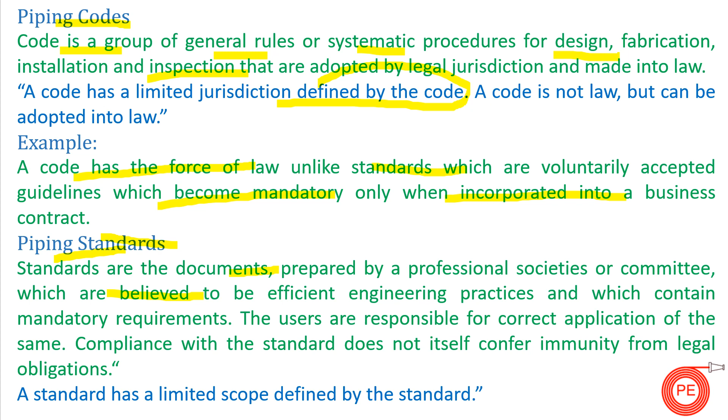So what are piping standards? So guys, standards are the documents that have been prepared by some professional societies or committees which are believed to be efficient engineering practices and which contain mandatory requirements. The users are responsible for correct application of the same. Compliance with a standard does not itself confer immunity from legal obligations.

So guys, piping standards are those documents which tell us about the best engineering practices. These best engineering practices help us fabricate and design things in a better way, and these documents have been prepared by industrial professionals who are efficient in their work and have huge industrial experience. So a standard has a limited scope defined by the standard.

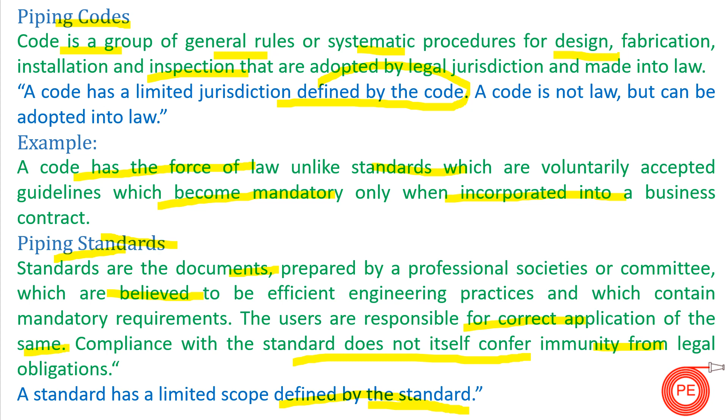So this is the difference between piping codes and standards, and both of them are sometimes confused by people and used interchangeably. So let's see in today's video what are the different societies and organizations followed all over the world which define these piping codes and standards. Every country generally has its own organizations and societies which define these piping codes and standards. For America, as you know, most of the piping codes, standards and design bases that are followed worldwide are American.

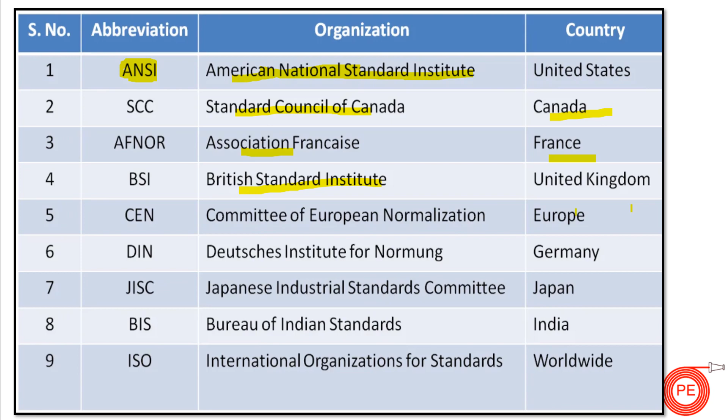So ANSI, that is the American National Standards Institute, defines all these codes. SCC is the Standards Council of Canada, that is Canadian. France has AFNOR, that is Association Française. The United Kingdom has its own British Standards Institution. Europe has the Committee of European Normalization.

Germany has Deutsches Institut für Normung. Japan has Japanese Industrial Standards Committee, that is primarily known as JISC. German standard, you would have heard about your DIN standard, and for British you would have heard about BSI standard. Our Indian standard, that is BIS, Bureau of Indian Standards, and the worldwide standards that are followed are of International Standard Organization, that is ISO standards.

So all these organizations primarily work and define all those standards, and they are more or less equivalent to each other, but country to country they may vary. So all these organizations generally look after these codes and standards which are made and enforced in a proper way throughout the country, so that uniformity is followed all across the country, all across the piping or process plants.

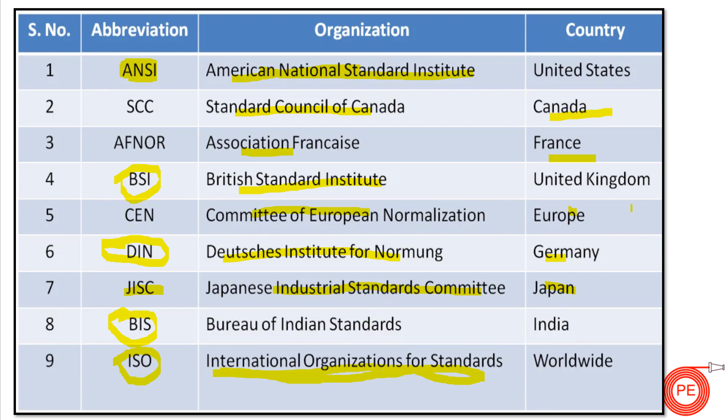So let's see what are the different codes that are followed in the industry. Below mentioned is a list of the codes that are generally used in our process industry. The most important and basic code which you would have heard is your ASME B31.1. ASME B31.1 is your power piping code. All the power piping related definitions, all the power piping related design criteria are mentioned in this power piping code, that is ASME B31.1.

When we talk about process piping code, yet another important piping code is ASME B31.3. All the important design criteria and fabrication related criteria that will be enforced by the law are mentioned in your ASME B31.3. Next is ASME B31.4. This is your pipeline transportation system for liquids and slurries. So basically when we design slurry lines and liquid lines, we have to follow the guidelines mentioned in this ASME B31.4.

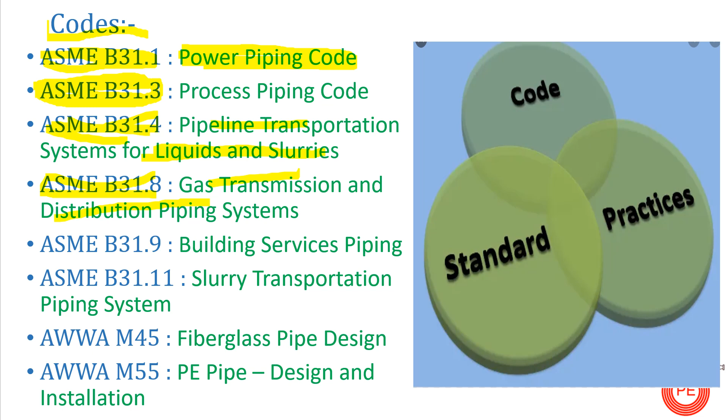ASME B31.8 provides us the information on gas transmission and distribution piping systems. Similarly, ASME B31.9 gives information on building services piping. ASME B31.11 is slurry transportation piping systems. This is also one of the important piping codes that is followed while designing any slurry transportation. AWWA, that is American Water Works Association M45, is for fiberglass pipe design. AWWA M55 is PE design and installation.

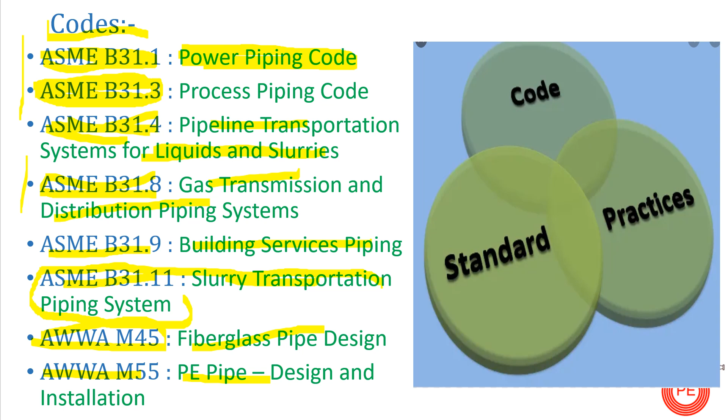So guys, we have a few other piping codes, but I have just taken a glimpse of the important piping codes that are used day in, day out in our piping industry or in our process industry. So let's see about the piping standards that are used. Because this is an Indian video, I have mentioned a few of the Indian standards here. IS 1239 part 1 is one of the important piping codes that is used in your process industry.

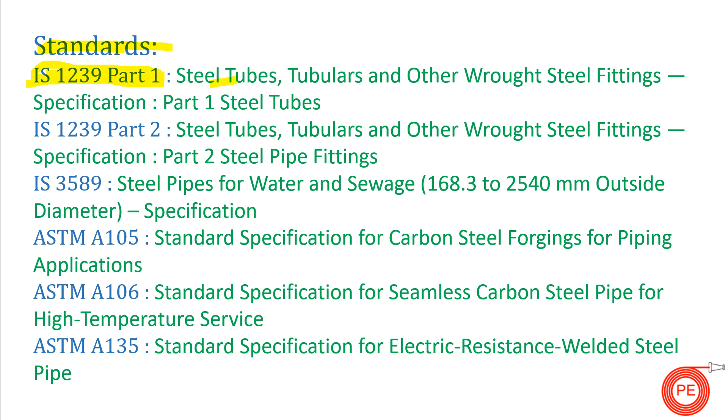This IS 1239 part 1 covers steel tubes, tubulars and other wrought steel fittings. So basically this is a pipe fitting code. IS 1239 part 2 is also a pipe fitting code, but the difference here is diameter. IS 3589 is also a piping code, but diameters greater than 150 up to 2540 are covered under this standard. Next is ASTM A105, that is standard specification for carbon steel forgings for piping applications. So carbon steel forgings are taken from this code.

ASTM A106, that is standard specification for seamless carbon steel pipe. So when we talk about seamless carbon steel pipe, what will be the design criteria and how they have to be taken care of is mentioned in this ASTM A106 standard. ASTM A135, that is standard specification for ERW pipes or electric resistance welded steel pipes. All the things related to electric resistance welded pipe are mentioned in this standard ASTM A135.

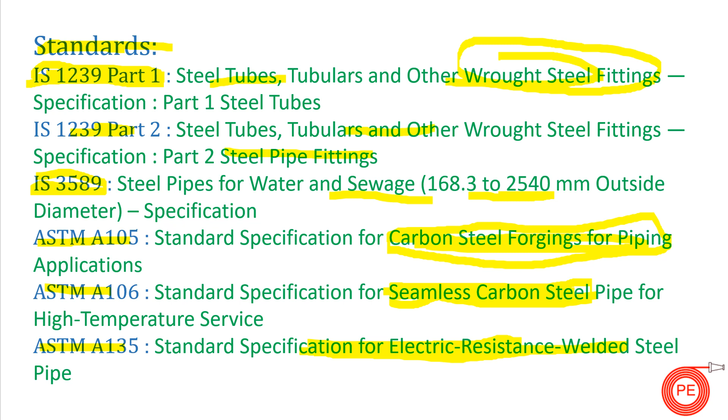Moving on to next. When we talk about schedule numbers, we all are aware of the schedule numbers. The schedule number is actually part of this standard, that is ASME B36.10. That is the standard for welded and seamless wrought steel pipe.

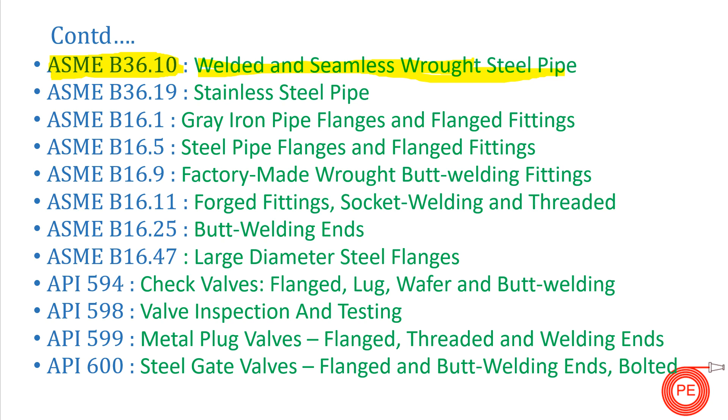So your schedule numbers are basically referred from this standard, and it has that schedule number chart. Next is ASME B36.19. So B36.19 is for stainless steel pipe, and schedule numbers for stainless steel pipes are taken from this standard. Next is ASME B16.1, that is your gray iron pipe flanges and flanged fittings.

So the dimensions of gray iron flanges, their thickness, their web thickness, number of holes, bolt size, all of them for gray iron flanges, that is up to DN 125, have been mentioned in this standard, that is ASME B16.1. B16.5 is again a flange standard, but it is for steel pipe flanges. So steel pipe flanges,

I want to tell you about the diameters of the flanges, what will be the thickness of the flange, how many holes are there, what will be the size of the bolt that will be used in the flange. For steel pipe flanges, they will be provided in your ASME B16.5. Next is ASME B16.9. ASME B16.9 is factory-made wrought butt-welded fittings. So basically large dia fittings that will be made in the factory, the dimensional standard, the design standard can be referred from this standard, that is ASME B16.9.

B16.11 is your forged fittings, socket welded and threaded fittings. So for socket welded and threaded fittings, for dimensions, for each and every design criteria, we can refer to this standard, that is ASME B16.11. Next is ASME B16.25, butt welding ends. So butt welded end fittings, what will be their length, what will be the height, what will be the thickness, and other dimensional criteria can be referred from this B16.25.

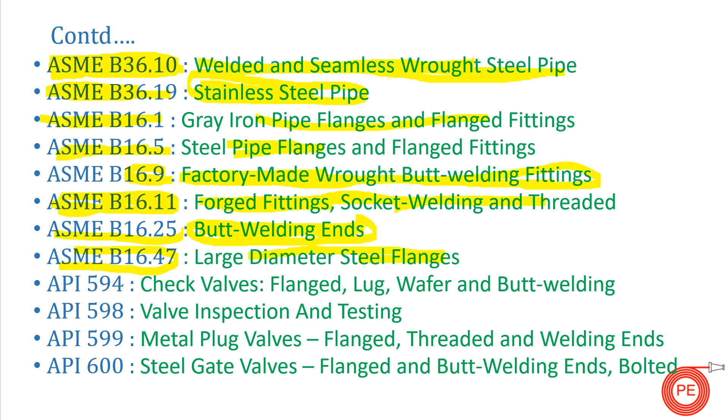B16.47 is your large diameter steel flanges. So flanges greater than DN 600. If you want to know what will be the diameter of the flanges, what will be the thickness of the plate that will be used, how many bolts will be used, and what will be the size or PCD of the bolts, that can be referred for large dia flanges from this ASME B16.47.

So if we talk about valves, API 594 is for check valves, that is flanged, lug, wafer, and butt welding flange. All these are types of valves. So for check valves, we have to refer API 594. API here refers to American Petroleum Institute. API 598 is used for valve inspection and testing.

So generally when we buy a valve, we ask the vendor or the valve manufacturer, what is your design, what is your inspection or testing standard. So all the testings have been mentioned in API 598. So all the valves that will be bought from outside will be tested as per API 598 criteria or the guidelines given in API 598.

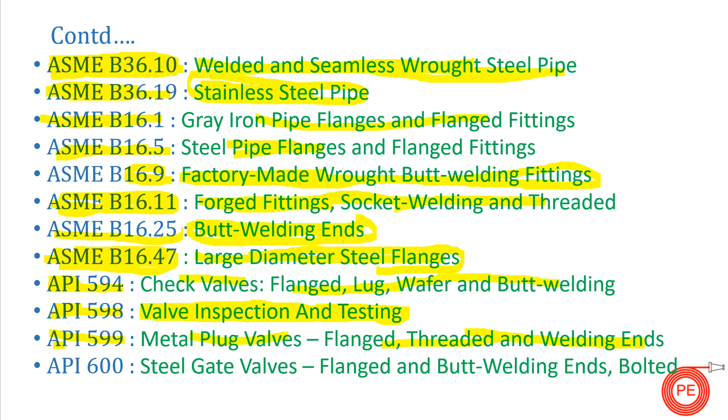Next is your API 599, that is for metal plug valves, flanged, threaded, and welding ends. So basically, flange to flange thickness, what will be the height of the valve, all of these things are mentioned in this API 599 for metal plug valves. Next is your API 600, so for steel gate valves, again for flanged and butt welded, all the dimensional standards, what will be the end to end distance, what will be the height of the bonnet, what will be the size of the flanges, all the things related with gate valves have been mentioned in this API 600 standard.

So guys, these were few of the standards and codes that I have gathered and made into a list. So I hope you would be able to see what are the codes and standards that we follow generally while designing for a process industry.